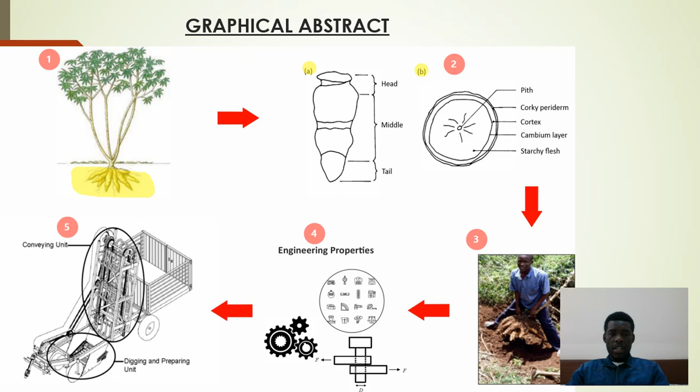Problem statement. Harvesting of cassava is very tedious, and there has not been a well-designed machine to harvest the crop, neither to separate nor convey the crop in one-time operation. So there is a need for a concrete harvester to do the process.

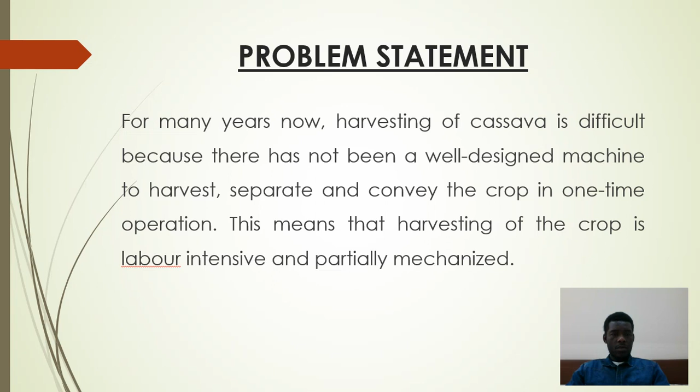Objectives. The main objective of the study is to review qualitatively the physical and mechanical properties of cassava, and secondly, to review some harvesting methods for cassava around the globe.

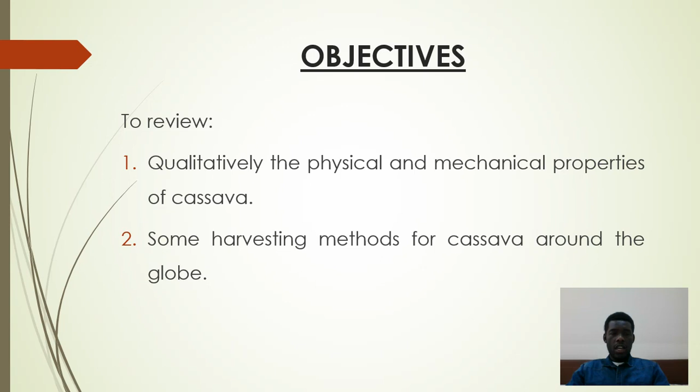End product of cassava. Some may ask, what is this cassava at all? Cassava originated from South America, and up to now it has been a staple crop in Africa and some part of Asia. For instance, Nigeria is the largest producer of cassava in the world.

Some of the end products of cassava include flour, used for making bread and pastries. We also have starch, ethanol production, animal feed, food for human consumption, pharmaceutical products, and many others.

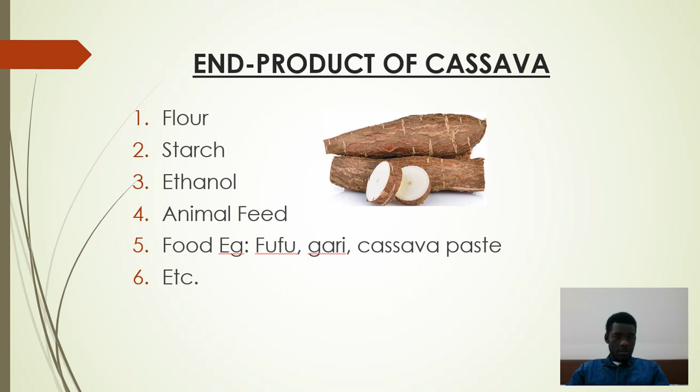Engineering properties of cassava. It is very important that the first step to design any machine is to know the engineering properties. As mentioned earlier, these properties are very useful and necessary in the design and production of agricultural equipment and farm machinery.

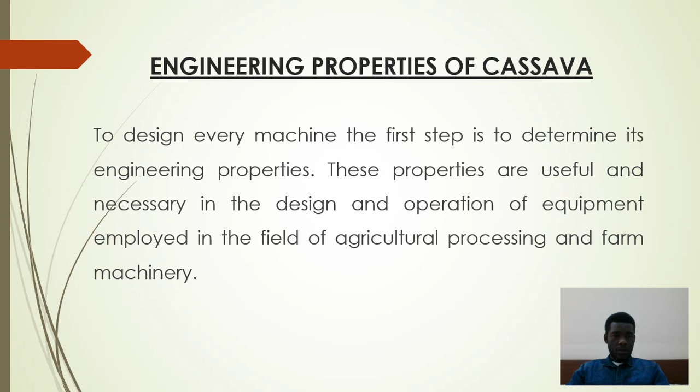Now, physical and mechanical properties. For the sake of this project, my main concentration will be based on physical and mechanical properties. As seen on this table, these are some of the physical properties that are to be determined before a machine can be manufactured.

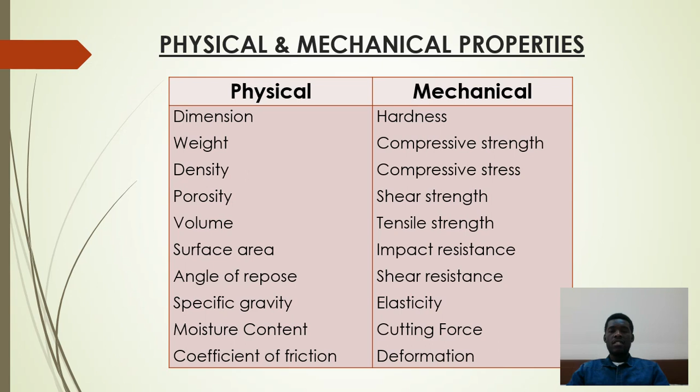For instance, the angle of repose is very necessary because it helps in the design of a hopper or chute for any agricultural machinery. Likewise, the mechanical properties such as compressive strength and compressive stress, shear strength, and tensile strength are all necessary in the design of any machine.

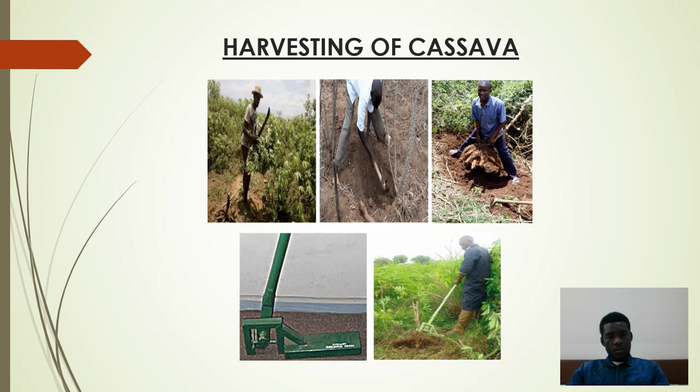Now we also have the mechanized method for harvesting cassava. This particular one we call the fork shear blade type, because the blades look like a fork. The second part we call the curve shear blade type, because it also looks like a curve.

Someone may ask, what are some of the advantages and disadvantages of this type of semi-mechanized harvester? It's true, every machine has its own advantages and disadvantages. For instance, with the fork shear blade type, there is minimum damage to the tuber in the soil as compared to the curve shear blade type.

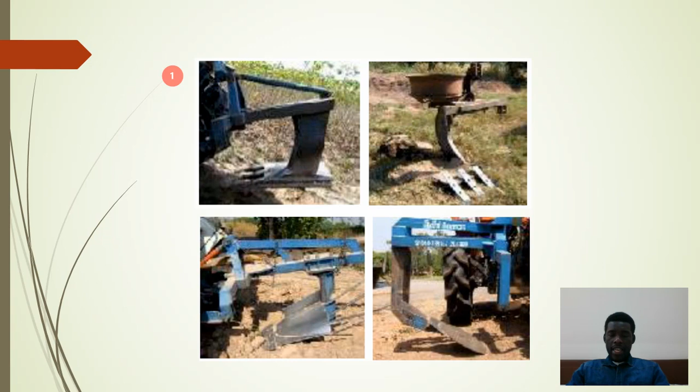The next slide shows another type of harvester, but this one is hitched to a tractor and uses a hydraulic system. This hydraulic system aids the upward and downward movement of the implement attached to it.

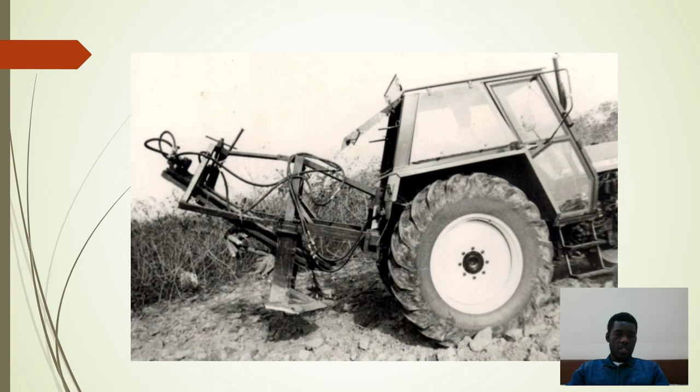In this slide is also another harvester that can be seen, one and another harvester. They are all hitched to the tractor to assist the harvesting process.

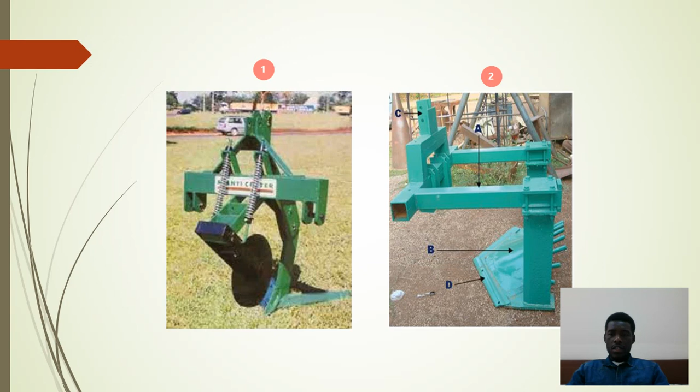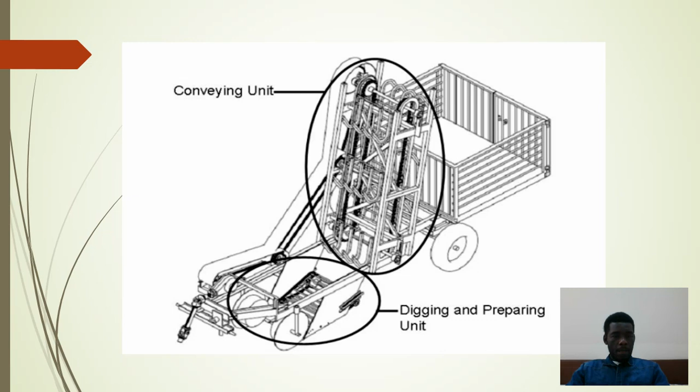Merit and demerits of mechanized harvesters. Based on the mechanized harvesters, we have their own merits and demerits. For instance, some of the harvesters have a conveying unit, but others do not. We can also see that some harvesters have a hydraulic system attached, whilst others do not.

In conclusion, there should be research directed towards loosening the soil, or loosening the crop in the root zone, thereby lifting out the tubers with minimum damage, because it's very necessary to research more on it so there is minimum post-harvest damage.

I'm also recommending that, just as we have combine harvesters used in harvesting maize and rice in a one-time operation, the same research can be done so that in cassava production we may have equipment that can be used in one-time operations. For instance, there should be a cutting device fixed in front of the tractor.

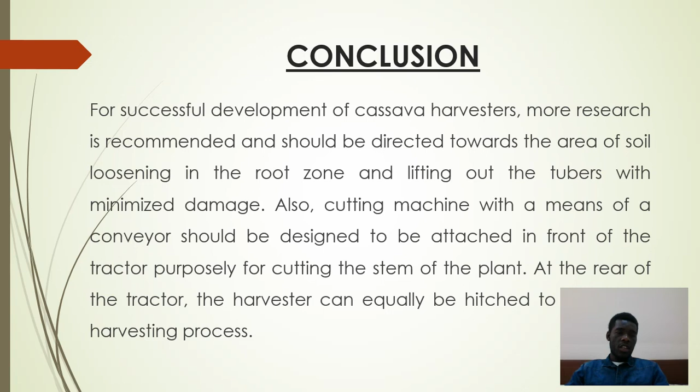That will do the first process of cutting the plant, and at the rear of the tractor there can be the harvester that aids in the process. In that situation, there will be a one-time operation of the process. Thank you very much.